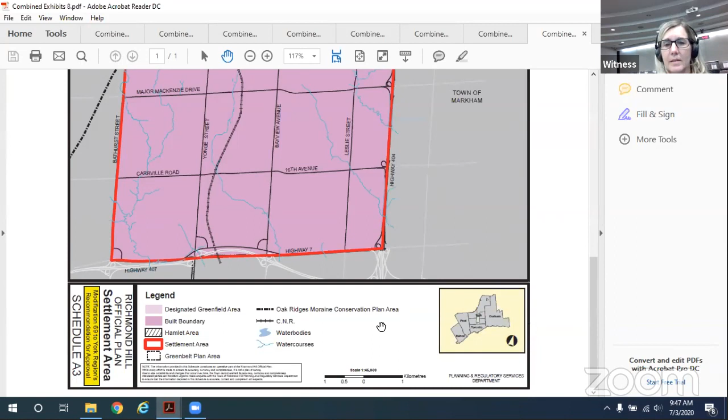This is an extract from the city's official plan - Schedule A3, that refers to the settlement areas, and you can see it also delineates the built boundary. This indicates that the KDA area, if you follow along Yonge Street just north of Elgin Mills Road, is located centrally where my pointer is - that's the location of the KDA, and as you can see it's well within the settlement area and the built boundary.

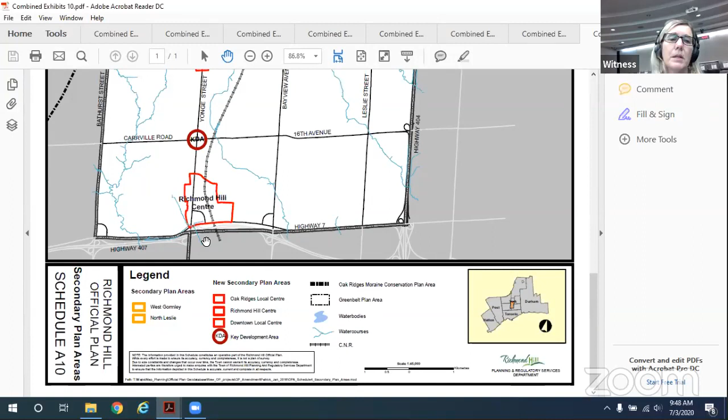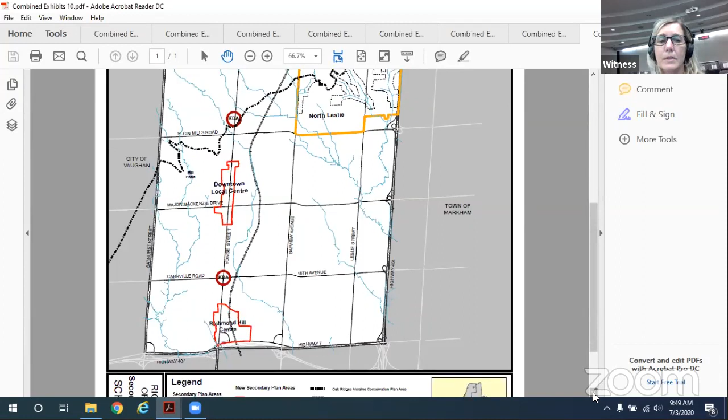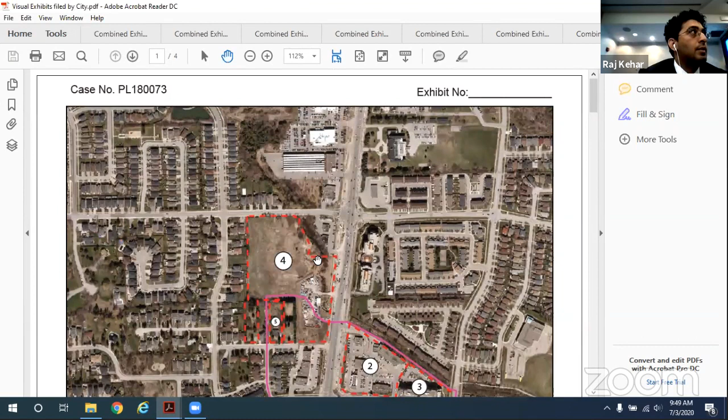And further, you'll note on the city's secondary plan area schedule, which is A10, you'll see the Richmond Hill Center here. You will see the KDA, referred to as the Yonge Street 16th Avenue KDA, just north of Richmond Hill Center, the downtown local center, and then you can see the Yonge and Bernard KDA just north of Elgin Mills Road. This is just for reference in the policy framework in terms of the secondary plan area of the City of Richmond Hill official plan. Those extracts can be found at Exhibit 1C, Tab 8.

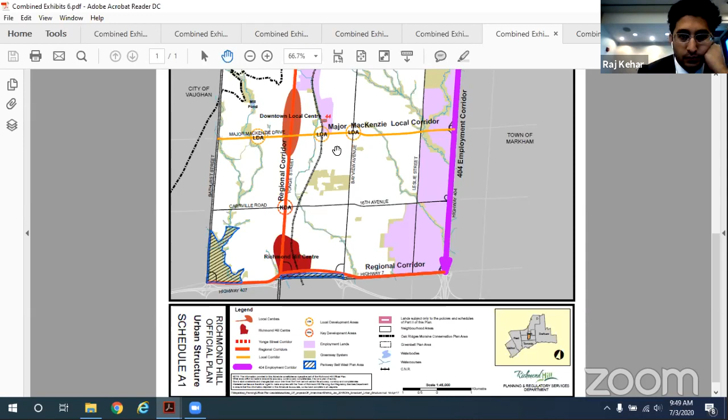I believe this is the urban structure schedule of the plan, and it replicates the KDAs as well as showing the Richmond Hill Center as the urban growth center. You can see the Yonge Bernard KDA in this location on the plan - that's Schedule A1, urban structure.

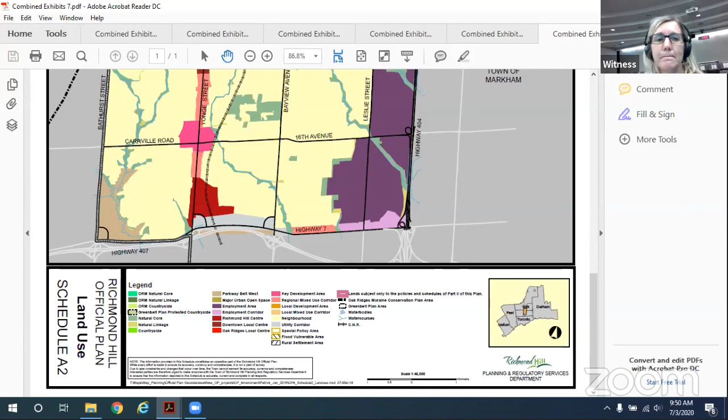And again, on the land use plan, we see the KDA just north in this pink color that's referencing the key development area, which again is an intensification area. You can see also on this plan that relates to land use, the various land use provisions provided along Yonge Street, and also the residential areas to the east and the west for context. That's on Schedule A2.

And also you'll note on this schedule, just for reference, that there are natural core areas located, as we talked about yesterday - the German Mills Creek and also the tributary of the Rouge. You can see those at those locations to the southwest and to the northeast.

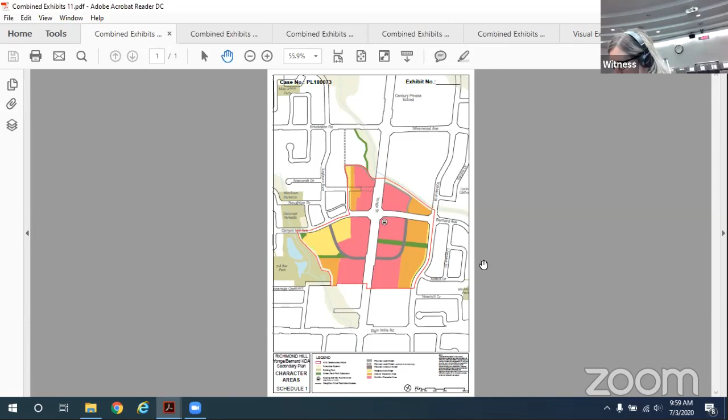Within the character areas, there are a number of policies that go on to identify the mix of uses and land uses that are permitted. The policies speak about height, density, and built form. These policies also include references to community services and housing. All of those policies are included in section 12.2, intended to provide policies to support intensification, directing various forms of height, density, and built form.

In terms of the policies that speak to the mix of uses, those are found in section 12.2.1 of the plan. These policies generally speak to the requirements for uses within the different character areas. The one change is that both plans continue to talk about the importance of maintaining and enhancing the area's existing retail and commercial function while evolving to provide for additional residential and employment uses.

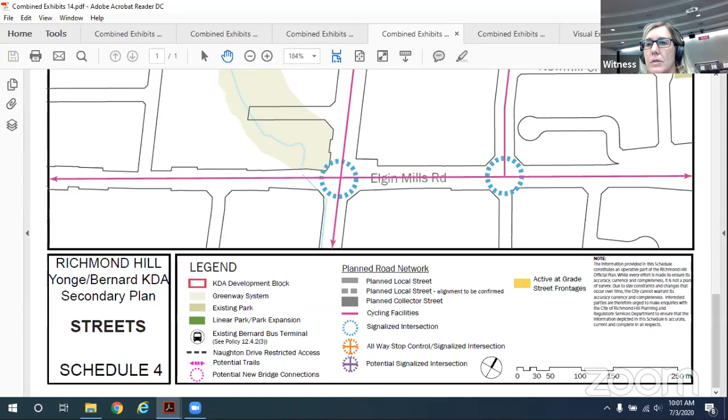There are new policies that speak to at-grade frontages, found at Schedule 4 that's introduced. Let me bring that up. This at-grade frontage policy is shown on Schedule 4 - you'll see it says active at-grade street frontages. This is a new policy in the section on mix of uses.

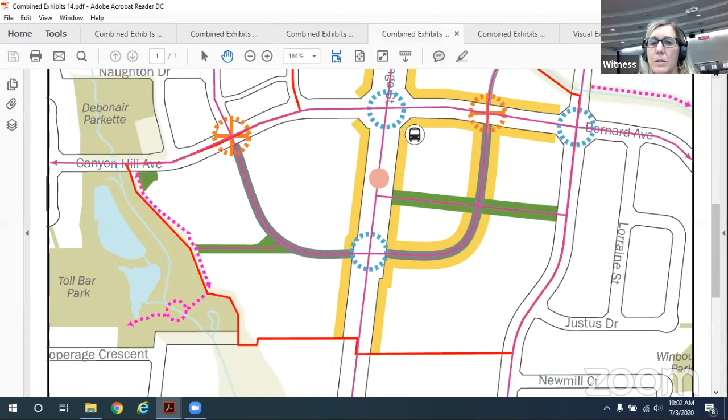This policy now requires a minimum of 15% of active at-grade uses to be provided in redevelopment. You can see from the schedule that this policy now applies to a number of areas along Yonge Street frontages, as well as Bernard, and the new proposed road that comes through the southeast quadrant.

Does that mean there's a maximum front yard setback? Is that sort of the effect of that policy? Not sure I really understand it. So in fact...

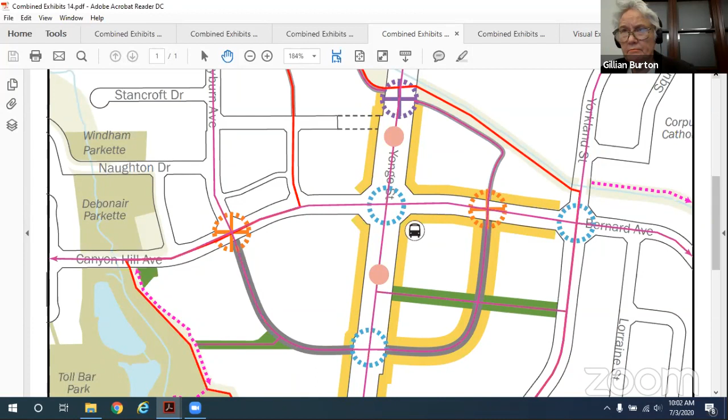The at-grade frontage policies are actually indicating - and this is again a change - it's encouraging that of all the gross floor area in redevelopment along those locations, 15% of that total gross floor area be provided in non-residential uses. Those could be commercial or office to provide for active street frontages at those locations.

I would also note that the intention with the policy as it continues on is for that mix to be in a mixed use building, integrated into a building at grade, but it can also be provided in standalone buildings as set out in the policy. It could be in a single building.

The other additional policy provided in the mix of use policies is actually implemented through the zoning bylaw - a requirement now for non-residential uses that exist in particular quadrants to be maintained or increased with redevelopment. When I go through the bylaw you'll see this: there's a certain amount of gross floor area today that functions for various non-residential uses, and this policy implemented through the zoning requires redevelopment to incorporate that minimum amount that exists today, in various forms.

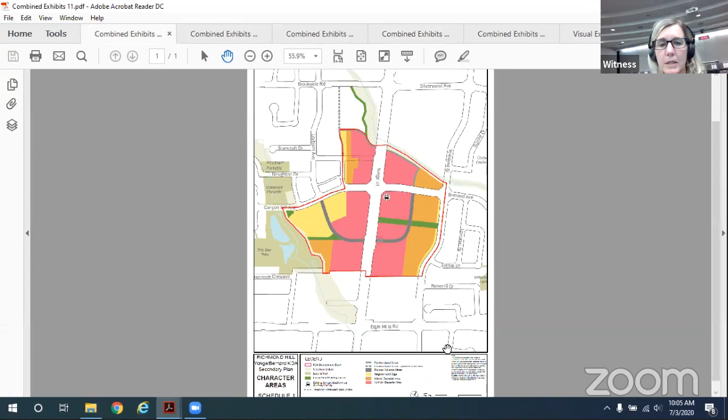I'll go back to Schedule 1 here - let me pull it up again, referencing those areas of neighborhood edge. These neighborhood edge areas have a maximum height of 3 stories, whereas the interior and the corridor character areas have a minimum height of 4 stories.

The difference between the November plan and this plan is that the November plan had a schedule similar to density that allocated heights, with ranges up to 15 stories in the corridor area, 4 to 10 stories in the interior area, and 3 stories in the neighborhood area. That reference to prescribed heights has been removed. The maximum 3-story height is consistent between the two plans, but the main change is that the prescribed heights in the previous plan have now been removed from the schedule.

For all three areas, with the exception of the neighborhood edge, which maintains the 3-story maximum in both plans.

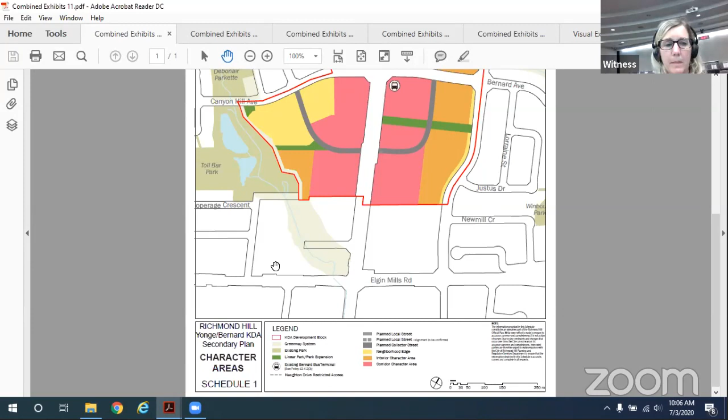Now going to the density schedule. This schedule, together with the policies, identifies prescribed maximum density in each of the areas. These policies also provide for the overall maximum density of 4.0 FSI, applying to the whole plan, and for the whole plan, a minimum FSI of 2.5. That's a change from the November plan, which had the minimum overall at 2 and the maximum overall at 3.

One other note in the density policies is that in order to ensure the minimum target for the major transit station area is achieved, that's 200 residents and jobs per hectare, the reference in the density policies now is that new development has to demonstrate on each development site that a minimum of 1.5 FSI is achieved. So that's a new policy that's introduced. The policies continue to refer to the highest densities along the Yonge Street corridor.

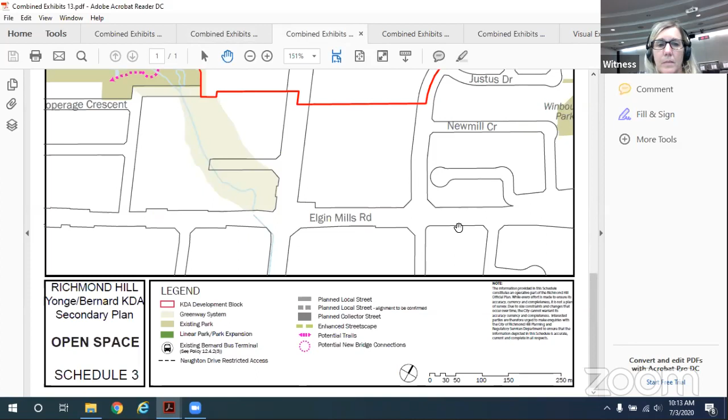The next section in the plan deals with parks and urban open space throughout the KDA. In the November 2017 plan, there was a Schedule 3 open space plan. The main change between the policies in the November plan and this plan is that the previous plan referred to urban squares, which were to be conveyed as part of the park system. The new plan now references urban plazas.

As you may be familiar with, the reference is to publicly accessible private open space, or POPS. The new plan provides policies incorporating these POPS or urban plazas through the redevelopment of sites throughout the plan, with policies that speak to those types of urban plazas.

You'll see on the schedule that these are not delineated. They're intended to be provided through the redevelopment process, whereas the previous plan identified the location of urban squares. The other change between the two schedules is a new linear park that's introduced. Again, there are policies for linear parks as well, and enhanced streetscapes. But the new linear park proposed on this schedule that was not provided in the November plan is the one that traverses the southeast quadrant, and you can see that located on the schedule.

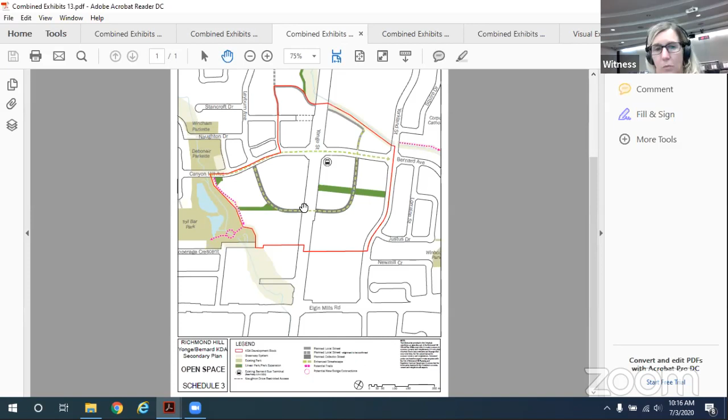Many of these policies and their direction are reflected in Schedule 4 to the plan, which I'm just bringing up now. Schedule 4 refers to streets, and these policies cover a number of elements related to the transportation system. They speak to active transportation, and as you can see, the schedule provides for a network - this idea of a public ring road system through the KDA, as we spoke to yesterday.

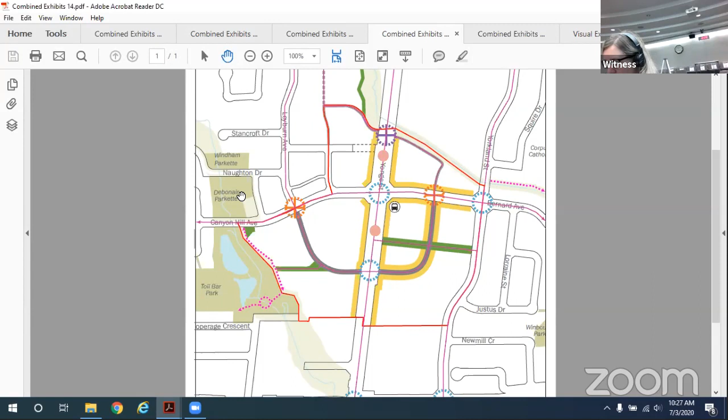Anderson, are you now going to be going into the bylaw? Yes. All right.

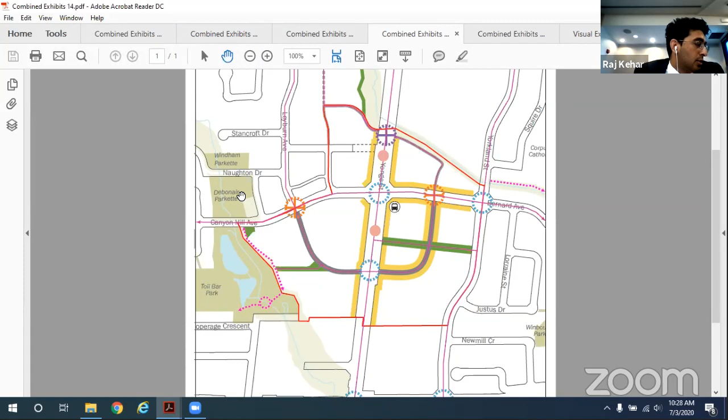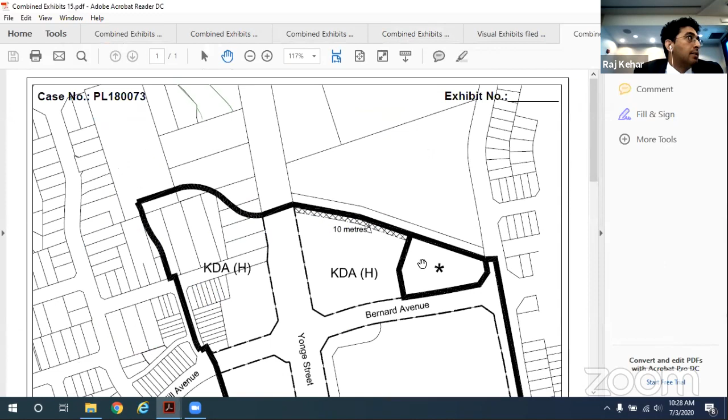Mr. Chair, I'm just going to give you some references as to where you can find the secondary plan with the proposed modifications. That's at volume 8 of the joint document book, Exhibit 1H, tab 33. Could you repeat that? Sure, it's at Exhibit 1H, tab 33. And the November 2017 secondary plan is available at Exhibit 1G, tab 26.

So, Mr. Chair, Ms. Burton, I'm going to take you through an overview. Just members, okay? Force of habit. A lot of people still say board. We accept it.

So I will now take you through an overview of the proposed zoning bylaw. Before I do that, I should reference the proposed changes to the Part 1 official plan, which I neglected to mention. In addition to the KDA secondary plan I just walked through, there are proposed amendments to the Part 1 plan, found in the document book as Mr. Kehar just referenced. Without going into detail, the indication from these policies is it's reflecting what is being proposed in relation to the overall density. The current Part 1 official plan policies relate to a maximum height for the KDA of 15 stories.

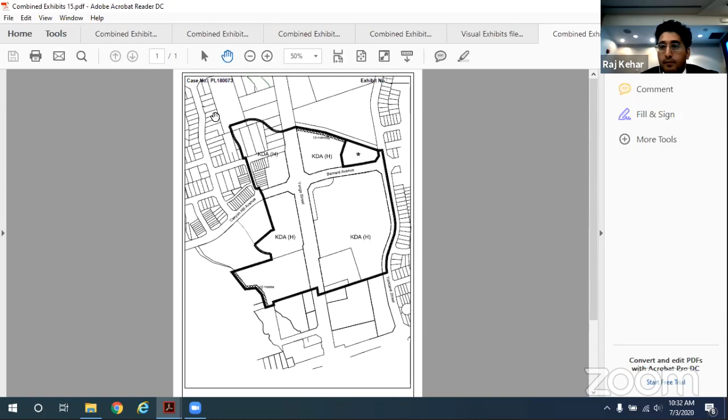So the bylaw itself—many of the sections in the implementing bylaw are very similar and have not changed as they relate to the administration section of the bylaw, as well as many of the definitions. I won't go through those, but the bylaw certainly contains an administrative section. It also contains a series of general provisions that are relatively the same as the implementing bylaw adopted in November. The one change that has occurred is in relation to the actual zones.

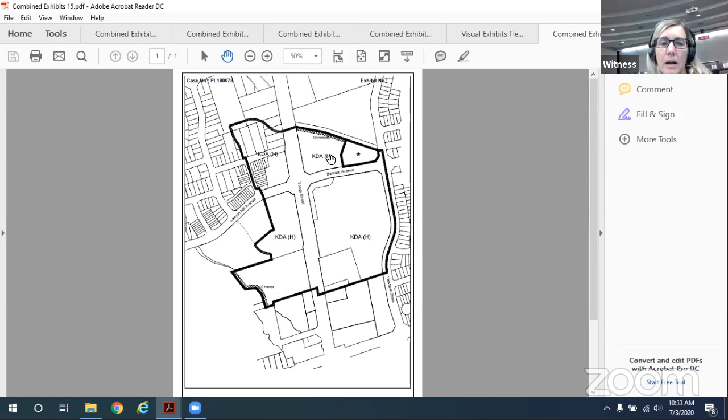You can see on the screen here that there is one zone that is applied to all of the KDA, and that's the KDA zone with a holding provision. You'll note the star, which is in reference to 70 Bernard, identifying that those lands have been brought in as an amendment to the zoning bylaw. So that zoning is in place. But the KDA zone now, as it's structured in the plan, is essentially identifying for the KDA itself.

It's the mixed use zone, and it permits a range of uses. The zoning bylaw provides a table identifying all of the various residential and non-residential uses that are permitted throughout the plan. Then, similar to most structures of the bylaw, you'll see a number of notations that are special provisions relating to those particular uses.

So one of the changes to the zoning bylaw in those notations is a reference to a new schedule, Schedule E, which, as I mentioned before, is the schedule that now, through implementation, requires that non-residential uses—the minimum set out on the schedule—be provided with redevelopment. So if I can pull up that schedule.

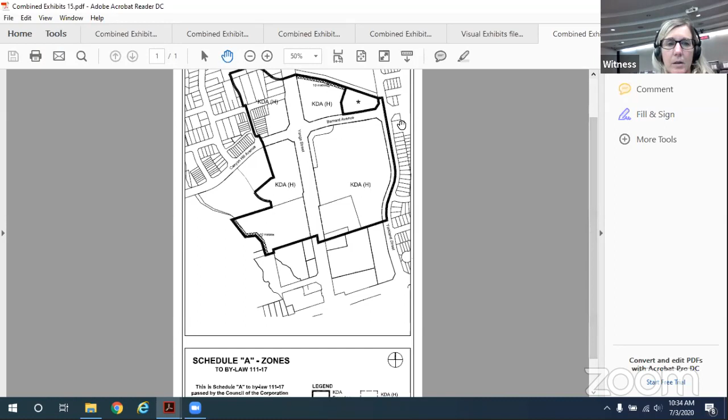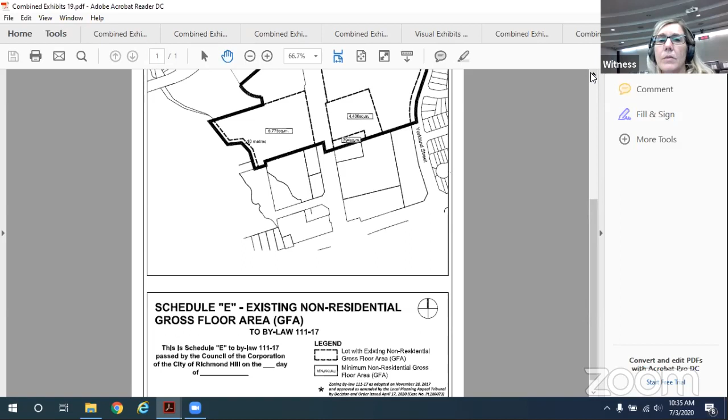You'll see on this particular schedule a reference in each of the quadrants to a number that relates to square meters. This is referencing the minimum non-residential gross floor area that is required to be provided with redevelopment of uses within each of the quadrants. So this is a new schedule that was not in the previous bylaw, specifically in reference to the notation for non-residential uses. You'll see in the table a reference to the new Schedule E.

I would note that in addition to that requirement, there are also policies that flow from that in the general provisions that speak to existing uses and also interim uses. The indication in the bylaw is that that particular regulation would not apply to the expansion or enlargement of existing uses which are permitted in the bylaw to occur. There are specific provisions in the bylaw that refer to expansions and enlargements of existing uses and interim uses.

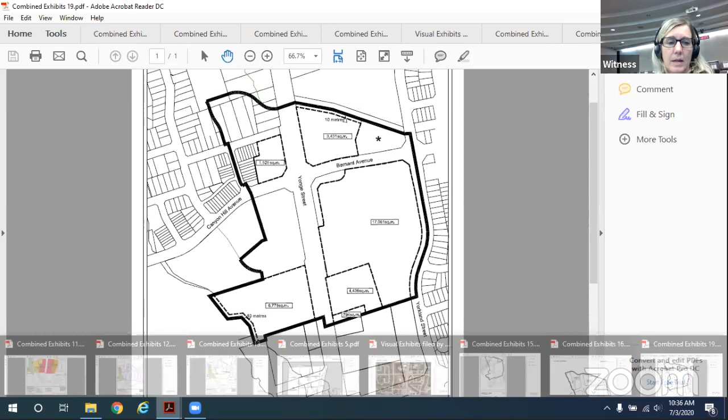There are also a number of general regulations relating to the determination of things like zone boundaries, and this speaks to implementing some of the policies. Where a parcel traverses two boundaries, how each of the density provisions and FSI provisions apply is set out in the zoning bylaw.

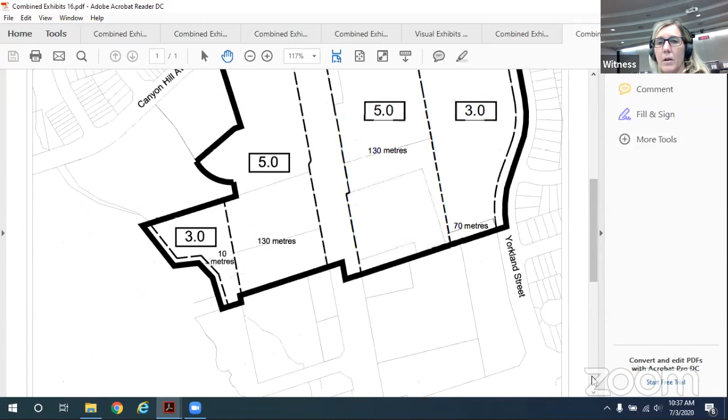Turning to the schedule in the bylaw that refers to the prescribed density, this again implements the official plan, illustrating those areas with a maximum FSI. The difference between this bylaw and the November bylaw is that this one now provides for 3 to 5 FSI as the maximum in the particular character areas, as opposed to the previous plan's 2.5 to 4.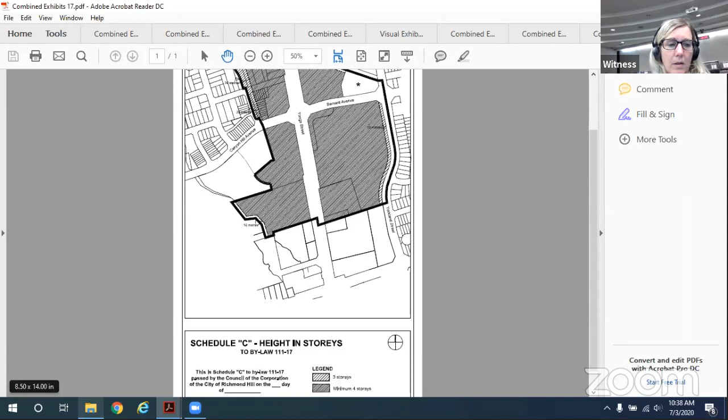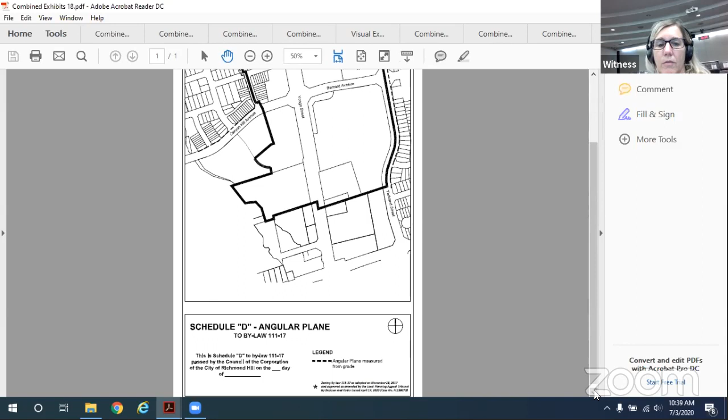One final additional change to the bylaw is the inclusion of a reference for angular plane. The intention of this schedule is to give clarity as to the locations from where angular plane is to be measured. Along the neighborhood edge areas, a dotted line indicates the location from where angular plane is measured to determine appropriate transition of height.

Many of the provisions relating to open space, one of the zones on the land use schedule, have no changes. There are some additional standards incorporated into the zoning schedule as it relates to different uses, but most general provisions remain the same with very little change. There are changes to the parking standards, found in the general provisions, resulting in reduced minimum and maximum parking standards for different types of units.

The one other change to the bylaw is the introduction of holding provisions, which provide for a number of conditions that must be met. These do not apply to expansions or enlargements of existing uses or interim development, but the holding provisions for new redevelopment generally identify requirements including achievement of the minimum non-residential GFA, and also require a functional servicing study report and a transportation study to be completed. Those are the provisions set out in the new bylaw.

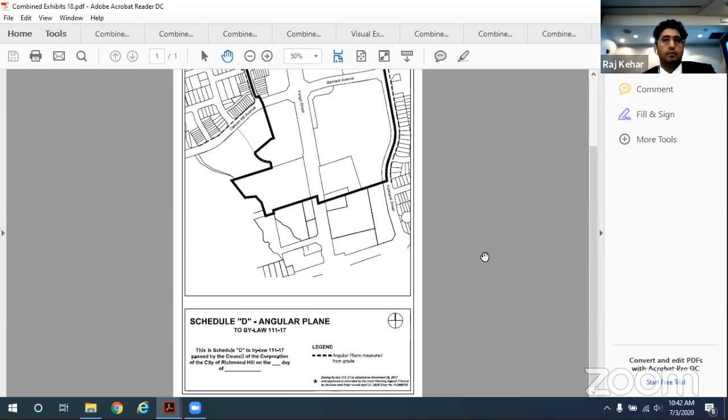I'd be happy to answer any questions. Nothing further, thank you. I didn't get to the other room. Is that it? Sorry.

Any small questions of clarification? Mr. Chair, I just wanted to point out, sorry, there's an echo. I just wanted to point out that in the hearing plan we prepared, it contemplated that in the event any party had cross-examination questions for Ms. Anderson, those would be deferred until the end of her main opinion evidence. I think that's why the chair said clarification.

Thank you so much. I think Mr. Streisfeld may have a question or comment.

I just had a few questions related to some clarification. I don't know how far, I don't believe this is cross. I don't believe anything I'm going to be asking is contentious. Everything was going to be put over until her opinion evidence was given, and then you could do both at the same time, or? That was certainly our expectation, Mr. Chair. Thank you. Thank you. Thank you, sir.